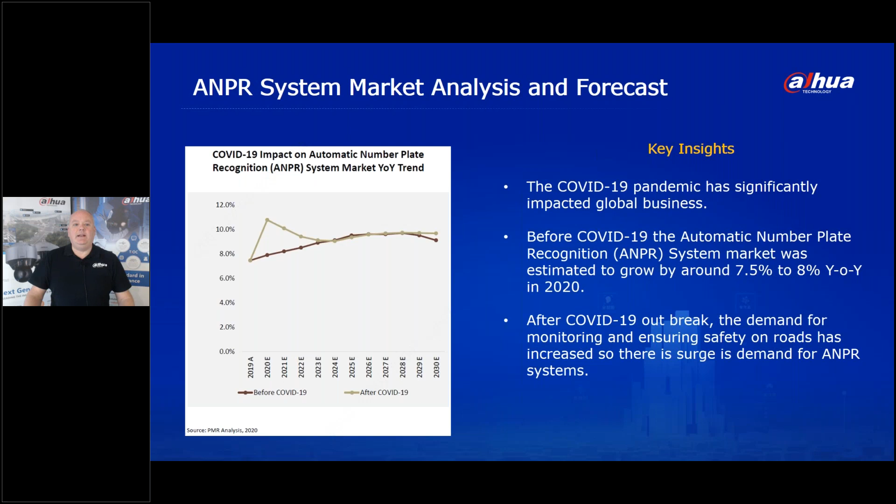So how are we going to capitalize on that? Let's look at some of those different opportunities. To start with, there are always new parking projects - we know greenfield sites are often building car parks.

Where I live in Berkshire, they're building a new car park in the town centre, so there are always new parking facilities. We can talk to the management companies there and focus on the demand of the end user, providing a differentiated solution for that project.

What about upgrading existing projects that are using card readers or RFID? We can easily upgrade those existing RFID solutions to use the latest ANPR technology. We can interface to third-party solutions using Wiegand protocol and integrate with third-party access control systems.

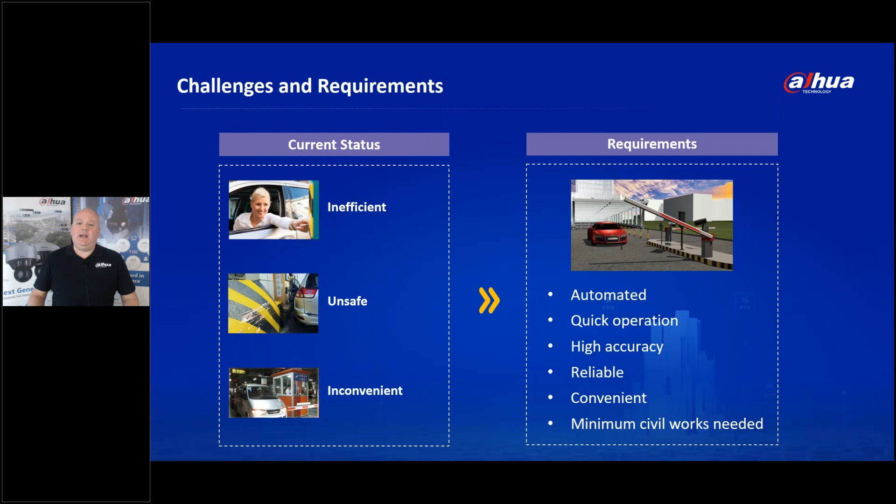If we look at the requirements, customers tell us they'd like an automated solution with quick operation, so there's no queuing and people can get in and out of the car park as quickly as possible. They'd like it highly accurate, so there's no discrepancy or dispute over parking times, reliable and convenient, and minimizing any civil work needed to dig up concrete around the entrance or exit. All of those things together create an ideal opportunity to sell an ANPR solution from Dahua.

The need to have a reliable barrier is very important. Dahua make an entire range of cameras and barriers. Some of them are articulated, some are 3, 4, 5, or even 6 meters in one swing, so in a single movement. We make a range of high quality, very reliable barriers that will carry on functioning for a long time, as you'll see a little bit later in the presentation.

We have software that will count the number of people in. If this is linked to our DSS software that we talked about earlier on, then we have the ability to say how many spaces are available.

And just on that point, we also make a full parking solution. Sometimes you've seen the red and green LEDs above parking bays to indicate whether they're vacant or full. We make that solution as well, and it can also be integrated into this. It's quite hard to retrofit that type of technology, but if you're talking to a car park operator about a new build, a greenfield site, it's a very good opportunity to sell the wider Dahua parking solution. But in its most basic form, we can tell the person driving in the number of free spaces in the car parking area.

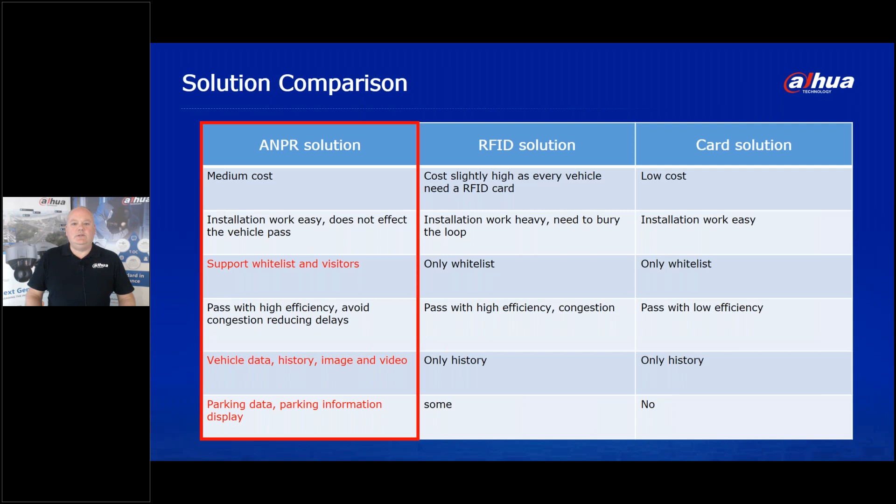So let's have a look at the solution itself in a little bit more detail. This is very much the workflow of the system.

As the car enters at the top left-hand side, the number plate is captured, and if they're on the allow list, the white list, then the barrier opens and the car drives in. If, for example, the license plate is impossible to read, maybe it's damaged or something like that, the barrier won't open, and the customer presses the video telephone, which is an outdoor rated device, hence the O on the end, and they get through to the control room.

The control room can manually open the barrier in that situation. If the car has a number plate that is on the blacklist and you don't want them to enter, maybe the police have given you operator information that they're looking for a vehicle, then we can create an alarm if that list has been loaded into the software. And if there's any situation whereby somebody unidentified has come up and it's not possible to read, they can press the VTO, the video telephone, and the concierge can control the barrier in a manual way.

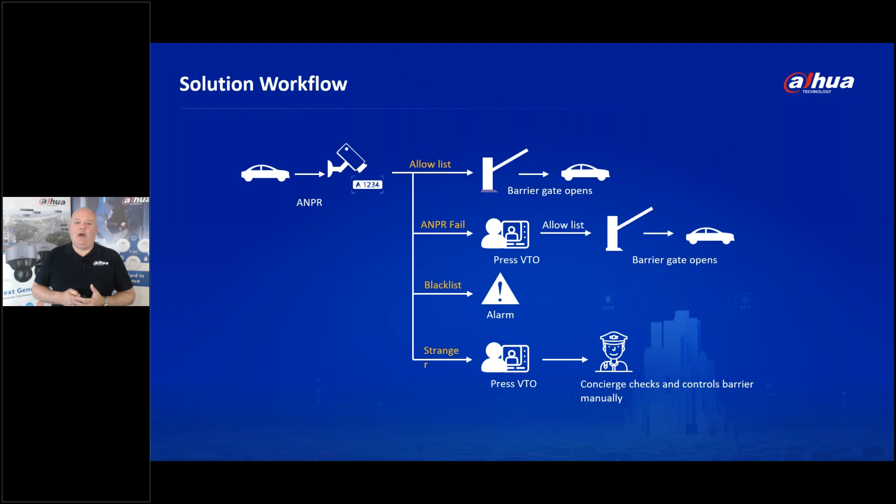So that's very much the workflow based on different eventualities. Let's have a look at the solution topology.

The car enters down at the bottom left-hand side, and there are the pieces of hardware we talked about just now. We've got the VTO, the video telephone, which is capable of talking to the control room. We've got the ANPR kit. In this situation, the kit comprises not only the camera sat atop the pole, but also the display to indicate the amount of vacancies or spaces within the car park.

And then in this example, the picture is of the straight arm barrier. The barrier is controlled from the ANPR kit, and the ANPR and the VTO are linked directly back to the DSS Express and the NVR across standard network connectivity.

When the person's come in, they've gone to pay the ticket, that's been validated, and now the car wants to exit. Again, we've got a duplication of the same sort of technology: the VTO, the kit again, and then the barrier. So kind of a duplication of what we've got at the entrance, on the exit.

Again, an integrated intercom, which really helps in the event that a car can't be recognized or somebody has a problem with the solution. We can allow that two-way communication. So that's very much the solution topology.

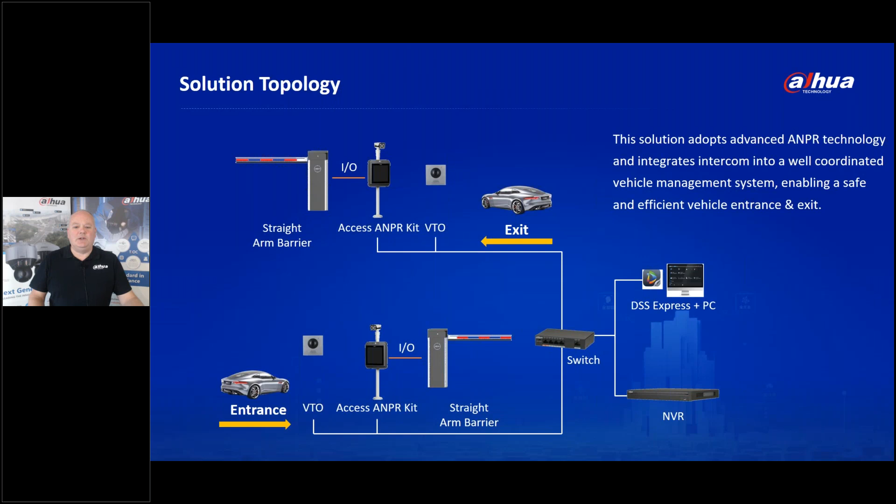Let's have a look at some of the different values of the solution as a recap. The first thing is it's pretty safe. We can use radar detection, a high precision device we'll look at in a few slides time. This device can be fitted to the barrier, and it will detect if a car is still parked there or a person is there, so that the barrier doesn't come down and cause any injury to the person or damage to the vehicle.

It's also very fast. The barrier operation is probably the fastest in the industry. It's an operation of 1.4 seconds, and we can go down as fast as 0.9 seconds with a shorter barrier. So very, very quick operation of the barrier.

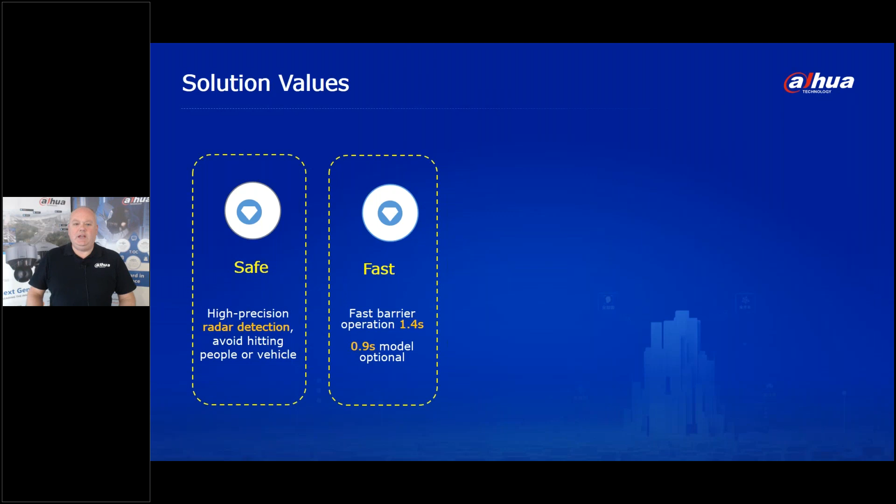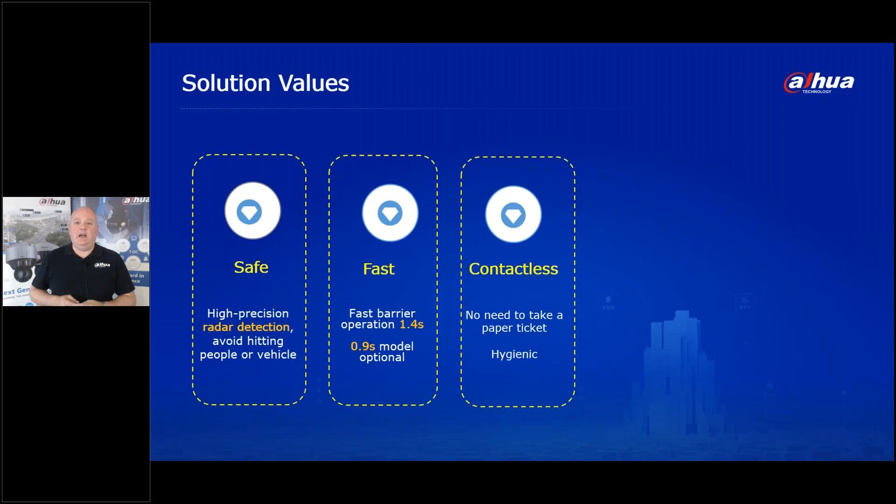It's contactless, as I said earlier. There's no need to have a paper ticket, so it's very hygienic. And in the era that we're in at the moment of COVID-19 and contactless payments, this really ticks a big box as far as being contactless and therefore more hygienic.

Also, network resilience. This is a really key thing. Network resilience is all about storing where we store the data. The data can be loaded into the DSS Express, and that's where all the records are held and maintained. But that white list of information can be downloaded to the ANPR cameras themselves. So if there were ever to be a problem, maybe some maintenance happening within the car park and one of the contractors cut through a network cable, the system is still able to function autonomously. So having that network resilience is really important.

Also integration. What about if, as I said earlier, maybe there's a retrofit opportunity? Not every site is a greenfield site. Sometimes there are barrier systems already installed, and you want to retrofit the Dahua ANPR cameras to that. Well, we can do that. We can integrate to existing barriers, or we can interface to third-party systems and solutions like payment systems.

We have over 300 integration partners that we work with in Europe. Many of them can provide solutions like payment, and again the opportunity there for integration is very high. We have an entire team of people here at the HQ in Maidenhead, where we can talk to those third parties to provide an end-to-end solution for you and your customers.

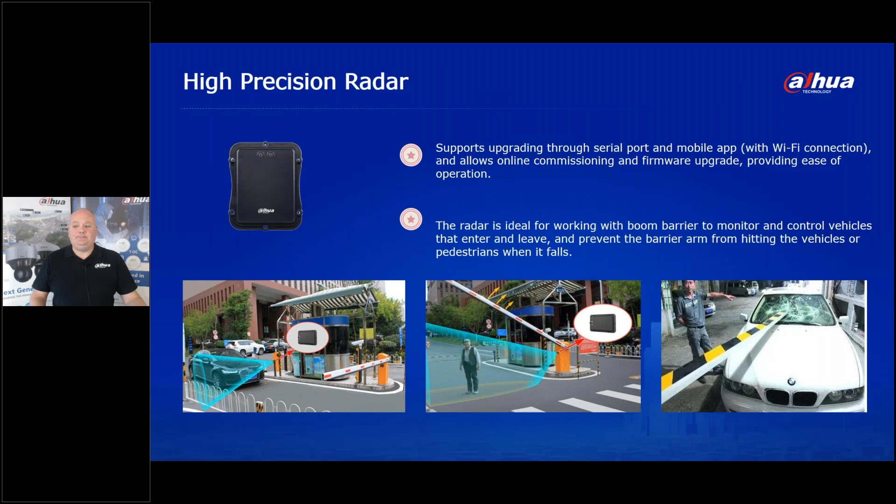There's nothing worse - even a barrier that takes maybe 2 seconds to raise, it's not long, it's 1, 2. But when you're waiting for it to happen, it often feels like a long time. So our systems are very quick in terms of their lift-up speed.

Not only are they quick, but they have an extremely wide temperature range. So incredibly good operating temperature range as well.

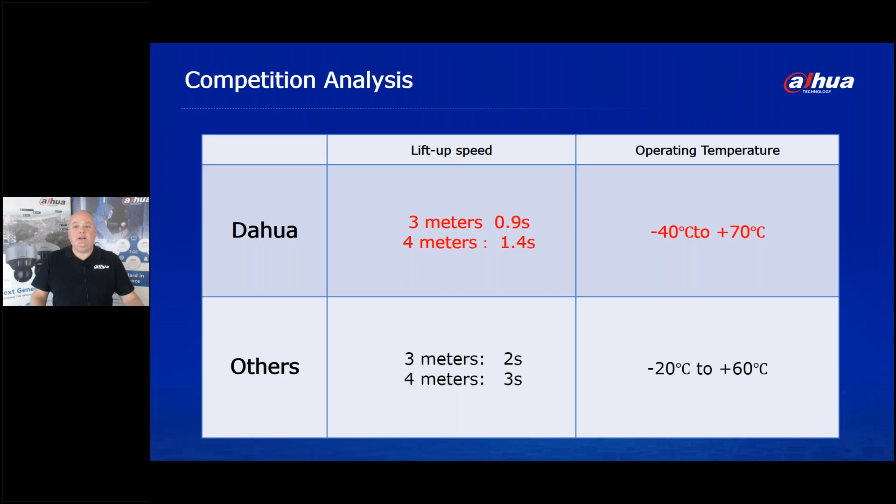But what if they're integrated? What if these systems are integrated to the DSS or the NVR integration? As I showed you when we looked at the system design earlier, we have an integrated platform for the video telephone and also the ANPR camera. They sit on a common platform, and they can go back to either our DSS software and/or the NVR.

We can provide real-time preview and playback for video recordings. So if there is an event, if something happens, we can provide real-time preview and playback there. We've got a history, a list of the vehicles approaching and departing. So again, from a security point of view, it's often what happens before or after that makes a big difference.

It may be that somebody at the barrier opened, the car went through, and they didn't drive very well, and maybe they contacted one of the sides of the gate, for example, and they say, no, the barrier came down on me. Well, having that video recording really can help you as an operator prove or disprove some of these fraudulent claims.

We've got an efficient search engine, if I could say it - the ability to search by a number plate, by a still image, etc., or by alarm, allows really quick operation there.

We've got the response to the VTO. Again, this is all provided by the DSS and NVR, and we can manage the use of visitors arriving and departing from the car park. All of them can be added very quickly to the whitelist as required.

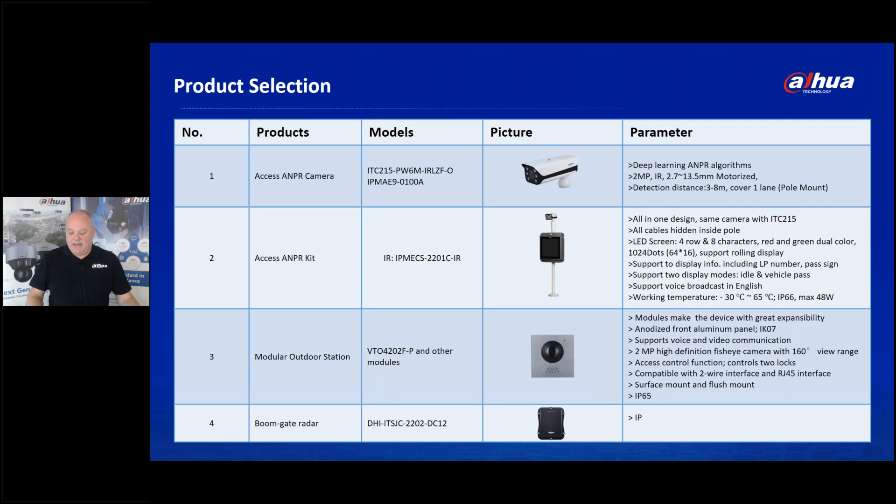And if we go on to the second page, you can see some examples of the barrier and the DSS Express information that we've been talking about.

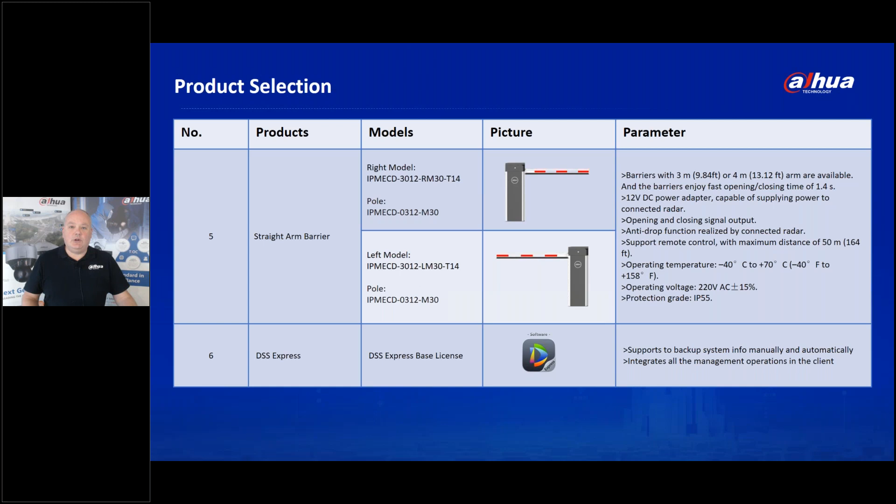Let's touch on a couple of success cases, picked from around the region. This one is a Serbian residential community with a private parking facility of 400 bays, not particularly large, but the difficulty was it had 4 entry and exit points. We were able to install 4 of our camera solutions, one at each entry and exit point, improving security and controlling the barrier with an ANPR whitelist, which dramatically improved efficiency and safety.

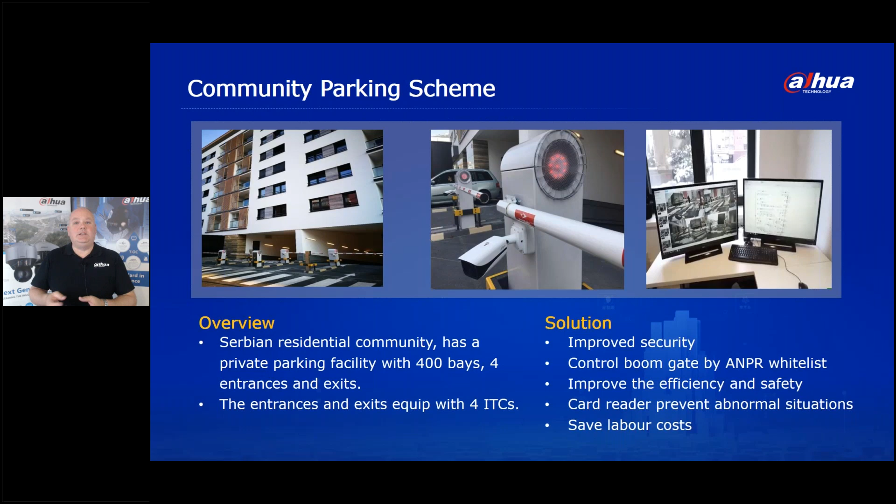We also had a card reader, which we'll touch on in more detail later, to prevent abnormal situations—if a number plate can't be read, or you want to add people to a whitelist, you can do that. Overall it resulted in saved labor costs. As you can see in the picture, this is not a Dahua barrier, it was an existing barrier, but our cameras are integrated with that solution. A really good example of a brownfield site where they wanted to upgrade to our ANPR solution.

The other example is a Denmark taxi waiting area. I'm sure many of you have seen taxi waiting areas at car parks, where taxis can wait for a certain period of time, effectively on a whitelist if they're registered with the airport, which they tend all to be. Instead of the barrier dispensing tickets—and I've often been in taxis with dozens of tickets, all wasted paper, completely inefficient—if the taxi is on the whitelist, the ANPR reads the number plate, the barrier opens, they're allowed 20 minutes or whatever the waiting time is, and then they leave.

This system brought a lot of efficiency, not just in terms of tickets printed and wasted, but in controlling access using an ANPR whitelist. If a plate couldn't be read for any reason, the VTO manages the abnormal situation because the driver can talk directly to the control room. A very good example of how we bring efficiency to a parking solution—from the operator's point of view, a big advantage, and from our point of view, a great opportunity to retrofit this technology to existing and new applications.

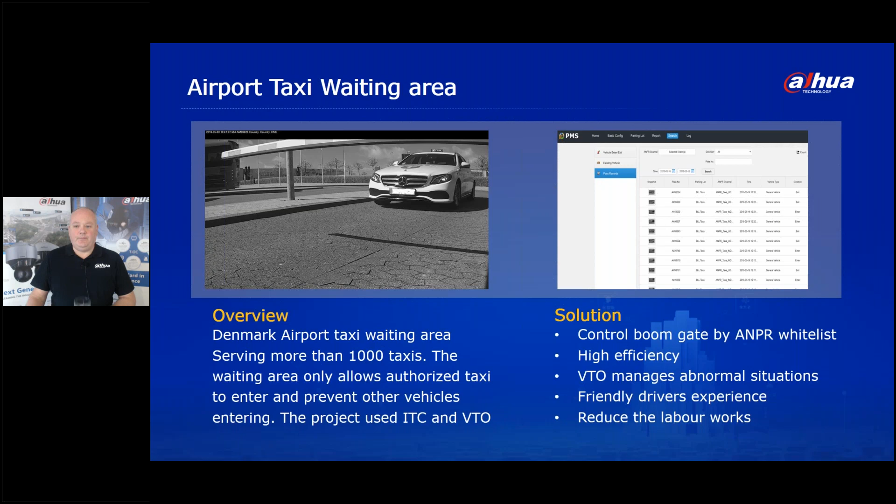So that's the ANPR solution for barriers and car parking. Let's look at how we get people in and out of vehicles—we've covered cars, but what about moving people in and out of buildings? Let's look at entry and exit solutions for pedestrians entering buildings, like an office building. We'll start with challenges and requirements, then move on to solutions, product selection, and success cases later.

Some of the current challenges: many of us have had experience with low-level security ID cards—just access control cards, millions in circulation throughout the world. The problem is, as I'm sure you've experienced, they can be lost, copied, sometimes falsely copied for fraudulent purposes. It can be difficult for security guards to recognize if that's really the person on the card. The repeat business required for card duplication and replacement is huge, so there's a big environmental cost, a cost to the organization to keep replacing lost cards, and sometimes a cost to the individual—many companies give you one free replacement, but charge 20 or 30 pounds for a second lost card.

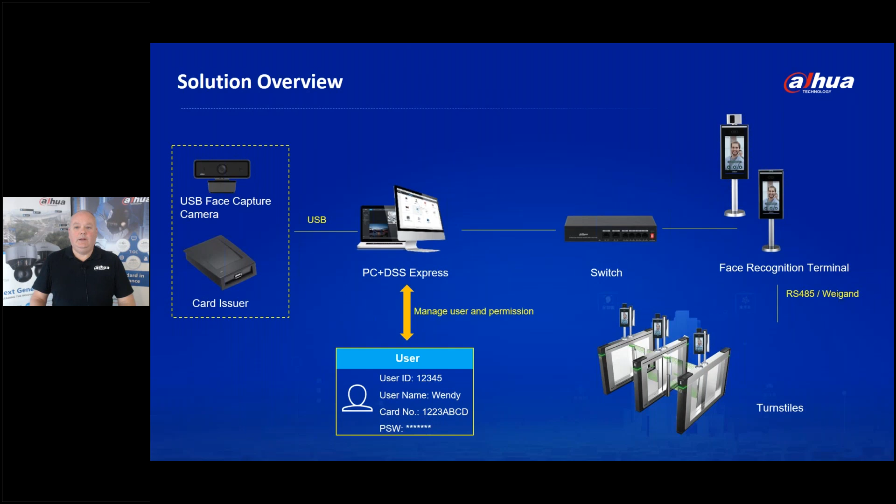So let's take a look at some of the solution values. To start with, it's very high efficiency. The gate speed is less than 0.6 of a second. It is the fastest opening gate in the industry. If you don't believe me, come in here to the office and have a look. You'll see it moving, it's pretty quick. So less than 0.6 of a second to open.

It's very safe, so we have 30 pairs of infrared detectors mounted on the inside of the gate, and you'll see that in a few slides' time. This is for anti-pinch, and also if somebody's maybe pulling a piece of luggage, or maybe they have a small child behind them, the barriers aren't going to cause damage or injury to the person or their luggage.

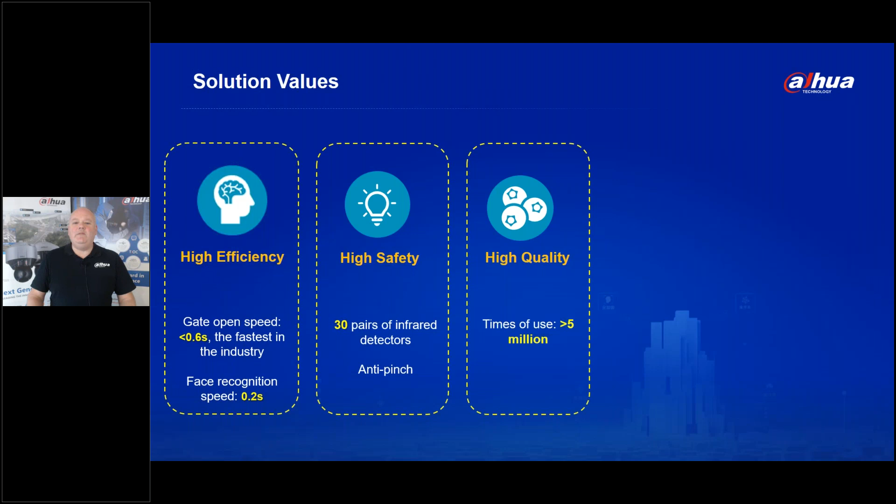It's high quality, so we test, and you'll see this in some slides later, more than 5 million times, and compared to industry averages, you'll see that's incredibly reliable. It's a contactless system, so we don't have to get people involved in touching things. It is completely contactless, and we can recognize anywhere between 0.3 and 2 meters away from the device. And above everything else, you've got to have accuracy, and we can deliver a facial recognition accuracy of 99%.

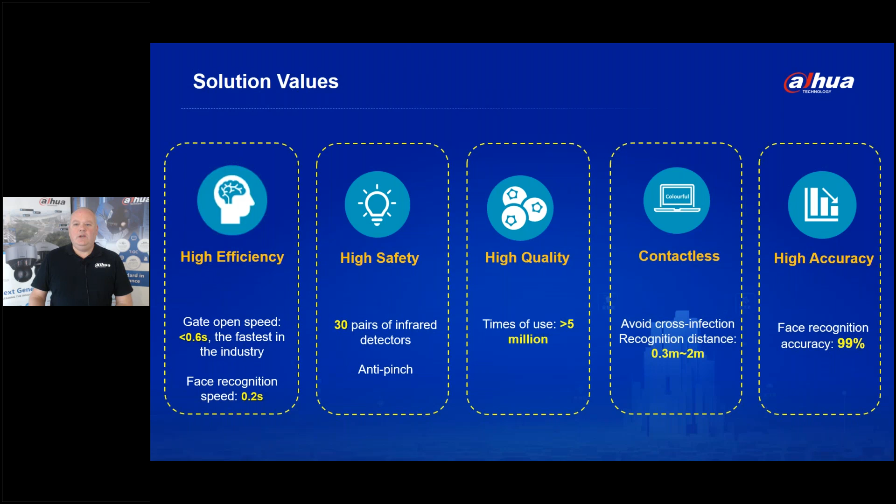So let's go back to the first one, high efficiency, and take a look at a little bit more information about the high efficiency.

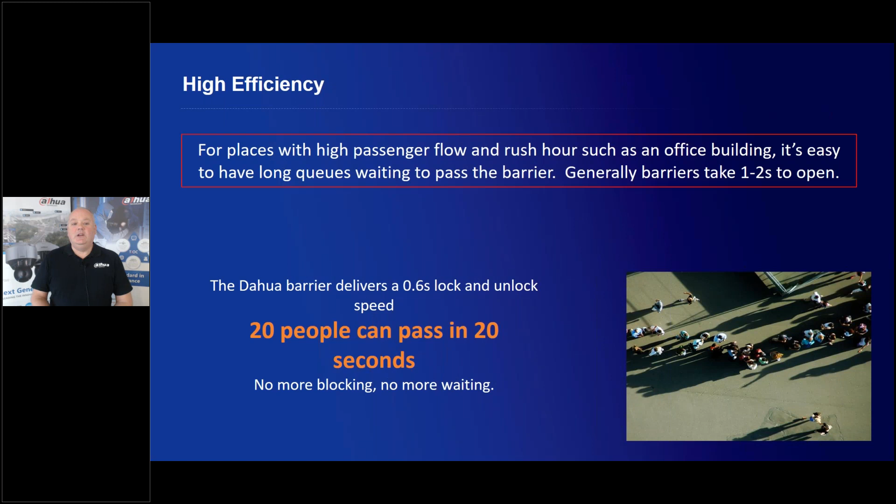This is for where you have a high number of people entering a building, maybe an office. It's very easy for queues to build up if one person fails to operate the system properly, maybe there's a problem with their card. We have the fastest unlock speed, so 20 people can pass in 20 seconds. No blocking, no waiting, no queuing.

The device is also very safe. I touched on this when we looked at a summary of the benefits. We have 30 pairs of IR detectors mounted on the insides of the construction, giving anti-pinch, anti-collision detection. So children, small children, pets, suitcases being trapped and injured is not possible with this system.

People can be detected at very close proximity because they've already been checked by the facial recognition. So the system is incredibly quick, and should it need to shut, it can do so very quickly.

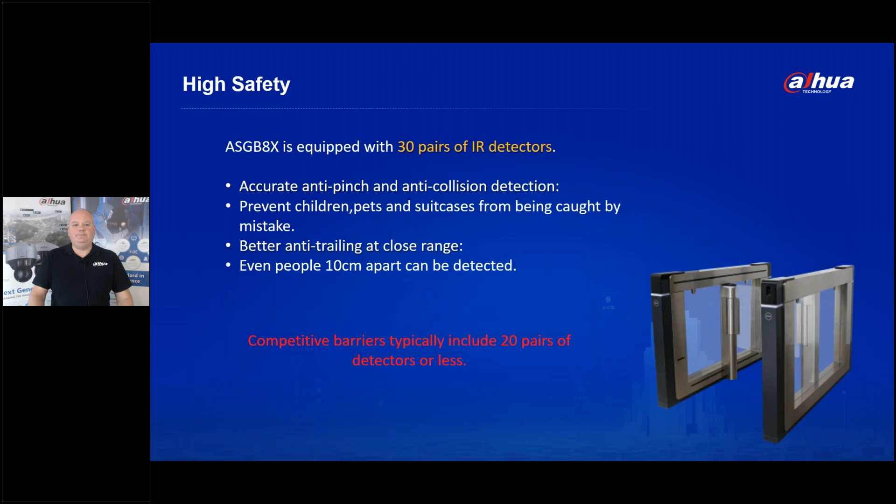I talked about the quality. That's very important. If you're relying on this as an entry and exit device to control people in and out of the building, it's really important that you have a high quality solution. Our solutions are tested more than 5 million times at a rate of 2,000 people per day. Based on that calculation, our systems are going to last between 6 or 7 years, compared to other barriers available which average a life cycle of about 4 years with a lot less operation. Ours are stringently tested, and a lot of the reliability comes from the quality of the materials and components we use.

To control the device, we use a brushless servo motor, so it's very low noise and very high torque, hence it's able to achieve the opening speeds we talked about. Because of the brushless servo design, we're also able to reduce the trembling you often see with access control products or gates, which move a little because they're not so stable. The brushless servo motor eliminates that problem.

We use 304 stainless steel for a robust design. People are passing this frequently, dragging bits of luggage around, so it's important that if they do contact with it, the operation is not impaired or damaged by luggage.

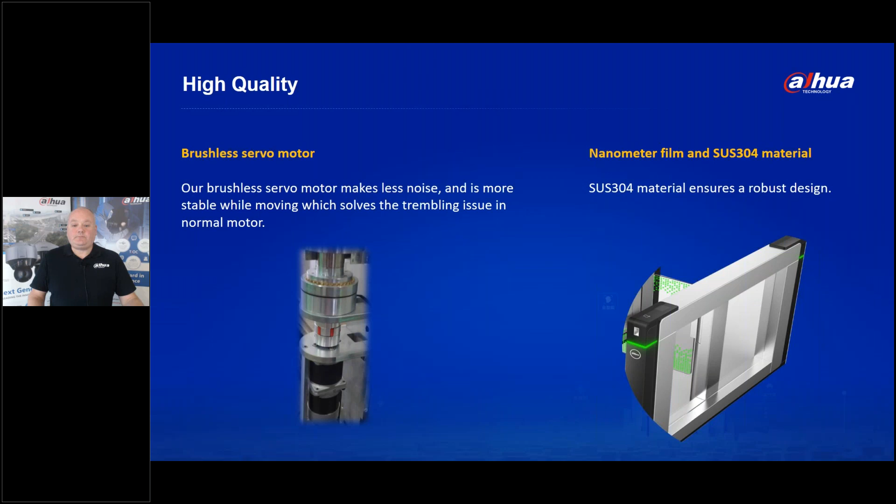It's contactless, and not only is it contactless, but it can also cope with people from small children, people in wheelchairs, up to a height of 2.4 meters, the highest range. Most people tend to fall within that range, so we have an entire range of heights that allow contactless operation of the barrier.

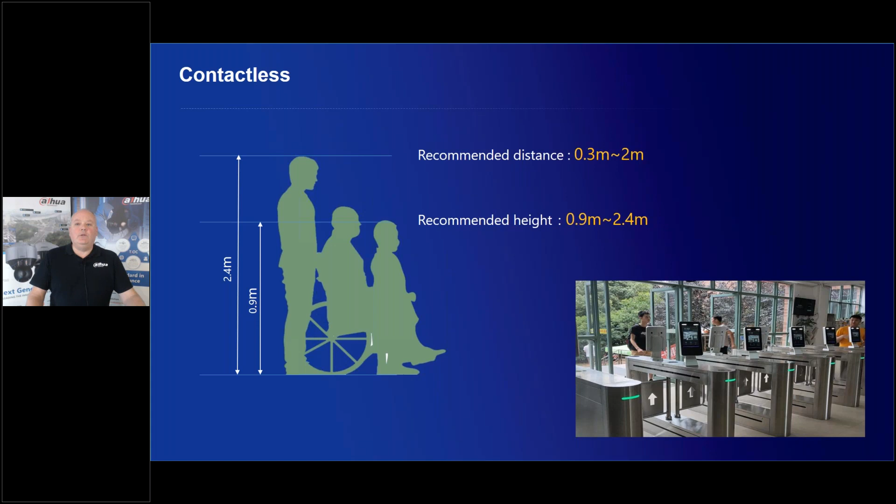One of the things we said was most important was the accuracy. We achieve a high level of accuracy by virtue of the anti-fake algorithm. So if you were to try to fake this in a high security application, maybe somebody takes a picture of a known face that they know will operate the system, prints it, and holds it up in front of them, which is a real problem that really does happen, we have a deep learning AI algorithm which prevents that happening.

We have a dual core CPU, and we can store 100,000 faces actually in the device itself, giving you that autonomy from the system in the event of a network outage.

Often these devices are installed into reception areas of buildings, and we find they're often in very challenging lighting conditions. So it's important that we have a wide dynamic range camera built into the access control device to cope with those conditions. A 2 megapixel CMOS imager is installed, again able to adapt to difficult lighting conditions.

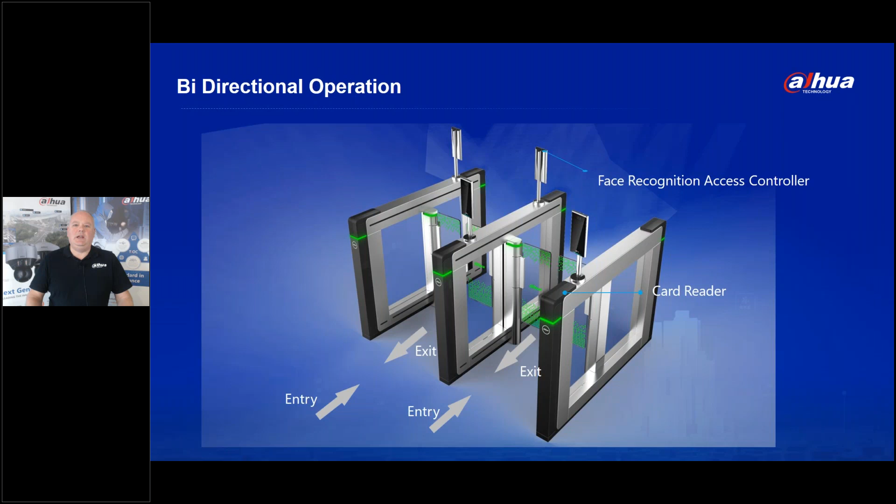On the point of efficiency, we have bidirectional operation, so the gates can open in and open out. If you install the facial recognition access controllers on the entry and exit points, they can work as in and out, or half working as in and half as out. They can be changed and configured however the customer requires, making very efficient use of the hardware.

But what about enrolling new people? Well, the way we do that is either on the device itself, or using the DSS Express. You can create, add and edit users and upload pictures using DSS Express. Don't forget, we've got the USB camera that can be connected to the DSS Express via USB to capture the person, create the record, and broadcast that to the readers on the system.

The system goes live. You can group into particular channels and create different authorization groups, so people have access to some entrances and exits but not others, just like a standard access control system. So it's a very customizable solution, all managed with the DSS Express software.

It's also a customizable solution. So if you or your customer want to add your own logo, we have a capability or system that allows that to happen. Also, we have default voice files like 'access granted,' etc., but if you want to customize that and create your own recordings, you can do that as well.

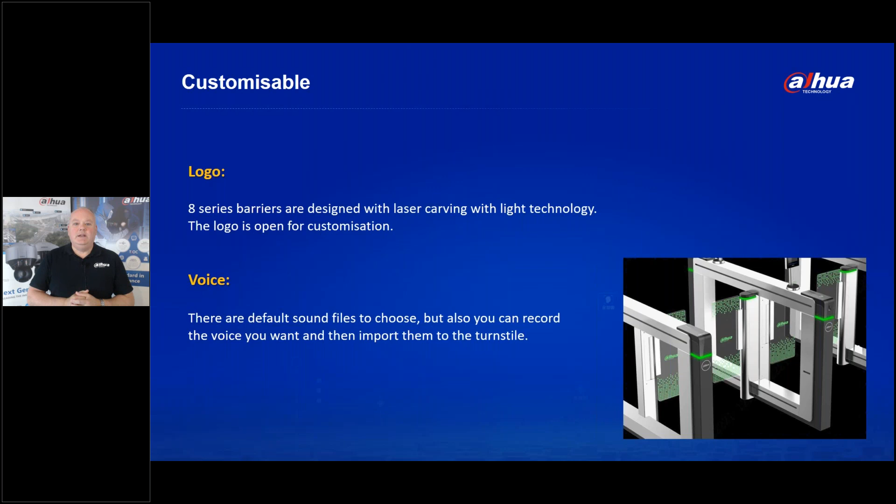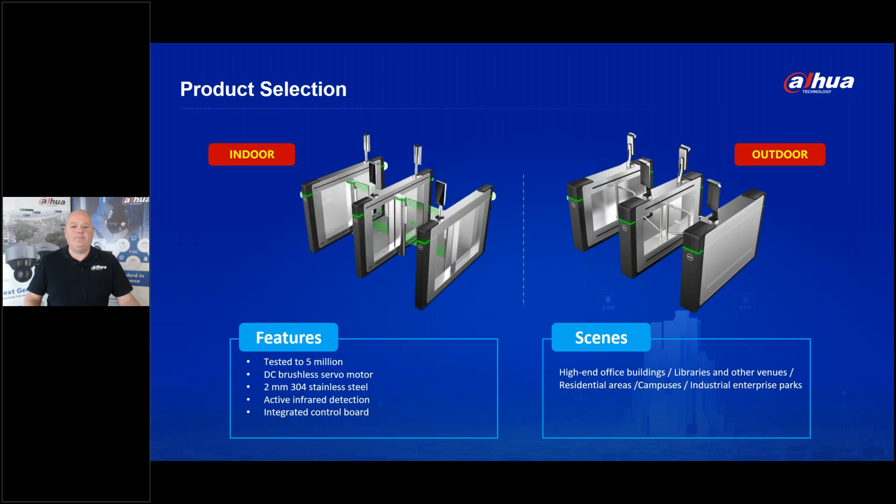And for the readers, the TMAC is over here on the left-hand side. You can see the temperature module here, adding that additional layer of security.

So is Simon allowed into the building? Yes, he is. Is he wearing a mask? Yes, he is - he's compliant with the mask policy. Does he have a temperature? No, he doesn't. Open the doors, grant access. But if any one of those checks is negative, then you don't allow access.